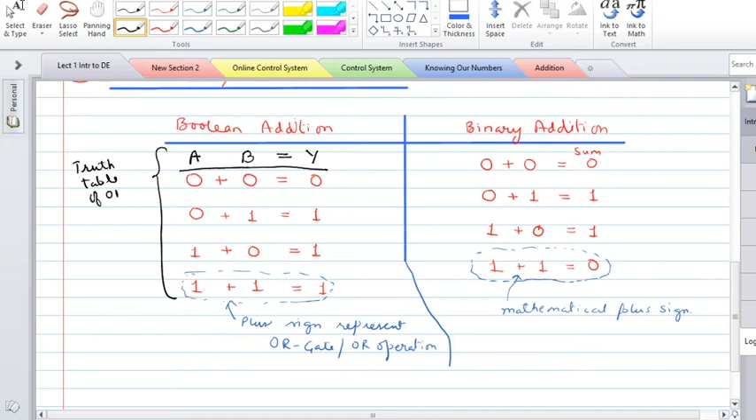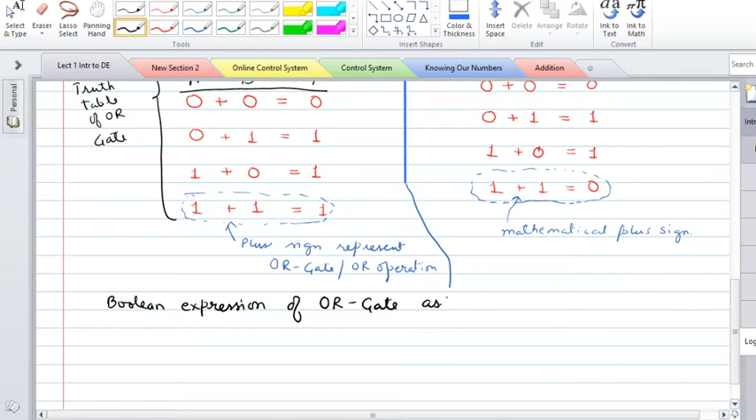Okay, so if we write down two variables here, one for this one and another for this one, and write down the output variable as y, then this forms the truth table of OR gate. Okay, so in this case you can represent the Boolean expression of OR gate as y is equals to a plus b.

Okay, where this plus sign represents OR operation, and read it as A or B. You can also write it like this, A or B.

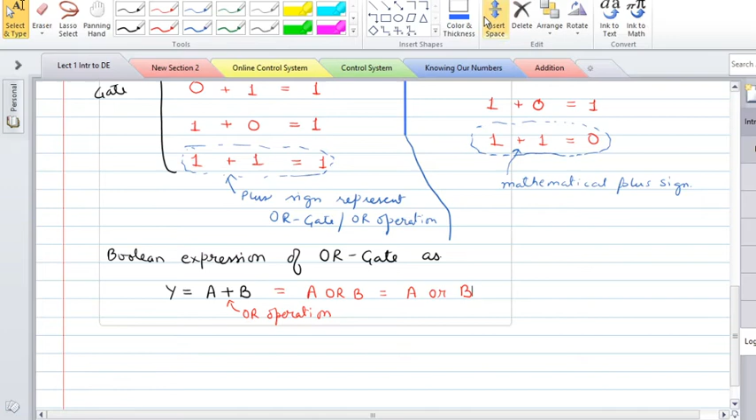Now the property of OR gate is that if any of the inputs of an OR gate is high or logic 1, then the output will be high or logic 1.

Now, if we talk about the number of inputs, an OR gate can have minimum 2 inputs to n number of inputs. And if we talk about outputs, the number of outputs can be 1 to m, where n and m may be same or different.

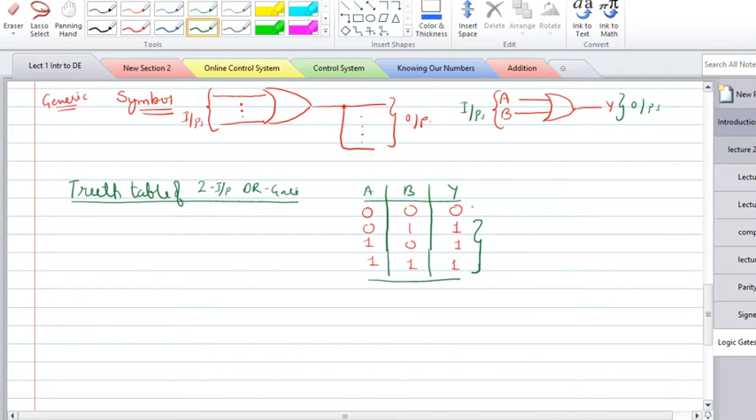Okay. Now, if we write the truth table of a 2 input OR gate, then it looks like this, where we receive the output 1 for all the combinations which consist of at least one input as logic 1. You can see the output combination from this to this. We will receive only 0 for the combination when all the inputs are 0.

The third gate is the AND gate. The AND gate will perform the operation of Boolean multiplication. In this case, if 0 is multiplied with 0, then your answer will be 0. If 0 is multiplied with 1, then your result will be 0. If 1 is multiplied with 0, then the result will be 0. And if 1 is multiplied with 1, then the result will be 1.

So in AND gate, this symbol of multiplication is replaced by a dot. So in this way, if 0 dot 0 is there, then output will be 0. If 0 dot 1 is there, output will be 0. If 1 dot 0 is there, output will be 0. If 1 dot 1 is there, output will be 1.

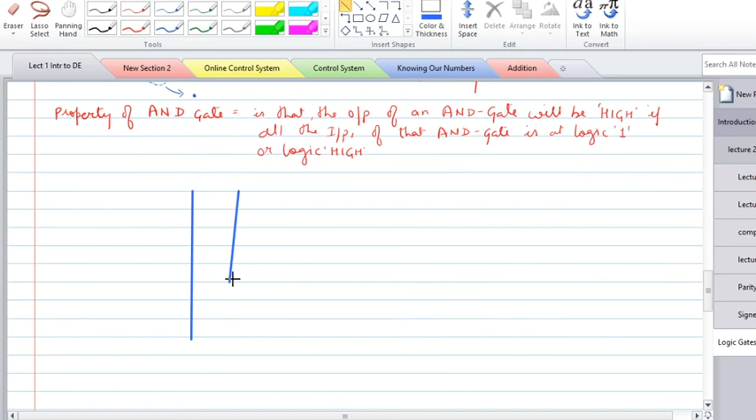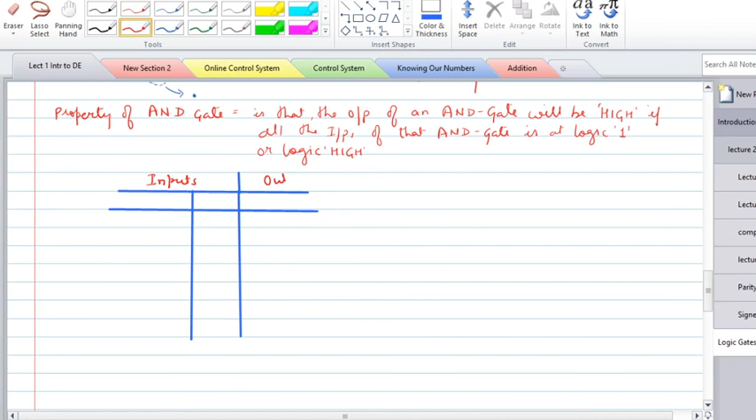That is, these are your inputs and here is your output. So A, B and Y: 0, 0 will result in 0, 0, 1 will result in 0, 1, 0 will also result in 0, and 1, 1 will result in 1.

And the Boolean expression of AND gate is Y equals A dot B. You can also write this as AB simply, or if you want to use AND gate for programming purposes, then you can also use this format, A and B. Okay.

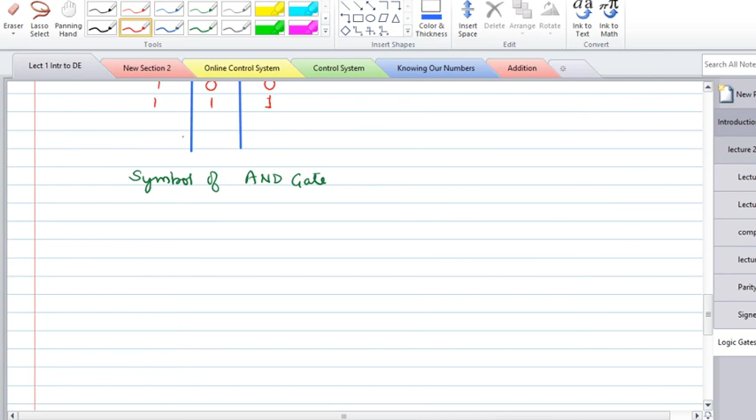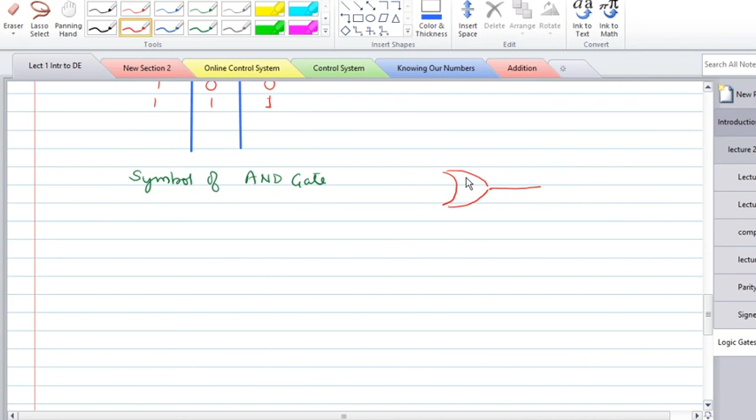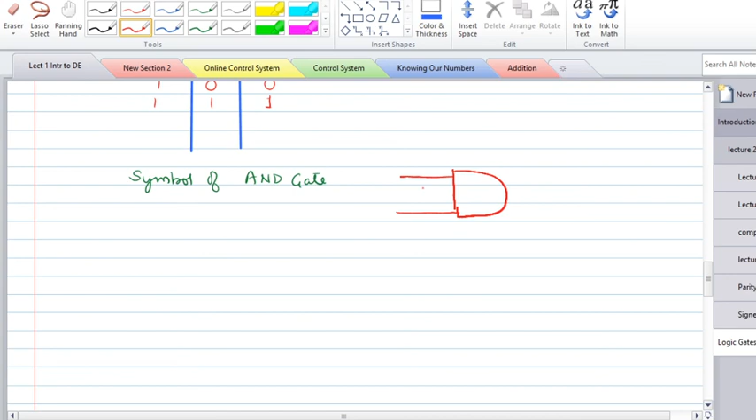Like this. So if we look at the symbol of an AND gate, then it looks like this. It can have n number of inputs. These are your inputs. Sorry, this is your OR gate symbol, like this. It's a semicircle. Then it can have a number of inputs here. All these are your inputs and its output Y. You can also use its extensions. Then this is your output Y.

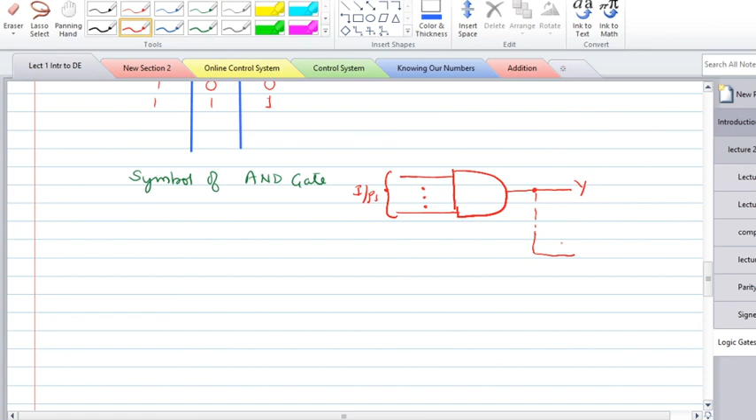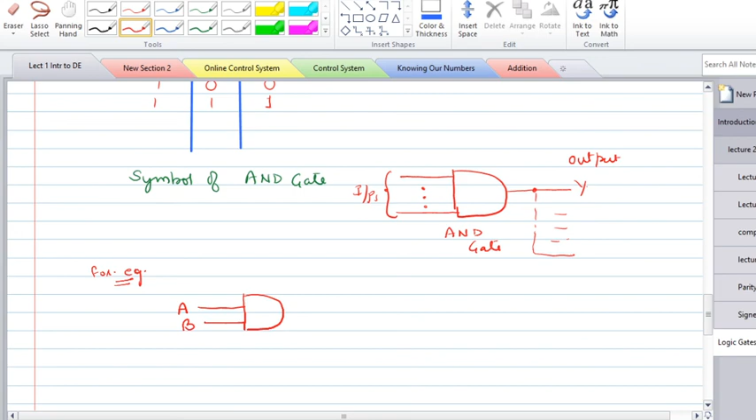And this is your AND gate. For example, if you want to draw the AND gate symbol for two inputs, then it consists of two inputs, A and B, and a single output Y, and this Y will be given like this, A dot B, or simply